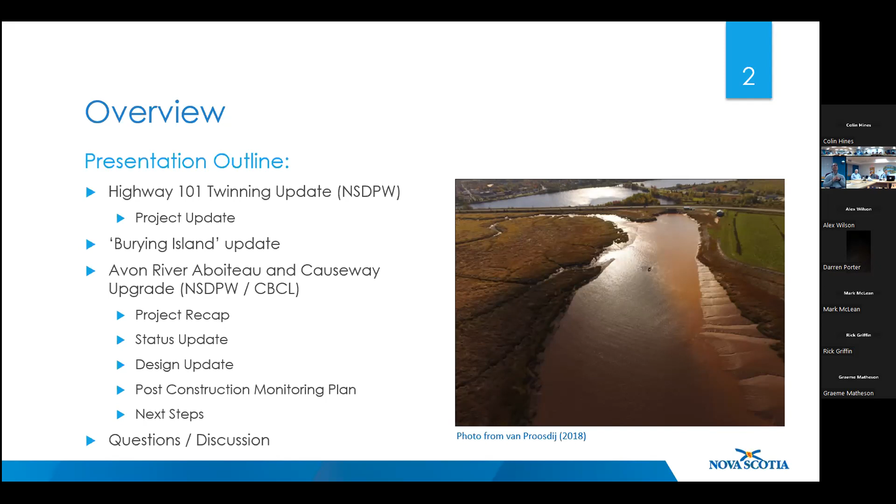Welcome everyone to the latest meeting. I think we last met end of summer sometime. So just a brief overview: like most of the meetings, a bit of a twinning update that Lyle's going to go through on where the highway construction stands today. There was an item brought up last time based on the Fort Edward report, the burying island question, and Bob's going to go through some stuff on that, we followed up there. Then there's a bit of a presentation by CBCL, and I might have some input on the Aboiteau and Causeway upgrading. And then discussion - I don't think we have to wait till the end for questions, we can hop into that in each section as they come up, so we won't limit that to the end of the meeting.

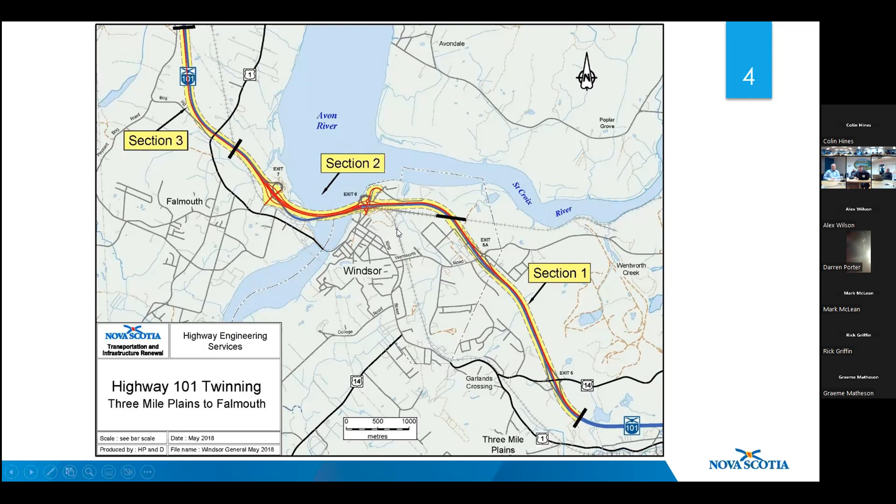So we'll just jump into those. Section 2A is kind of from that Windsor Railway area to exit 6. There are some eastbound lanes there that are still kind of, you'll notice, got a double yellow on it as you're heading eastbound. There's upgrading for that.

We're hoping to get that this fall, but just with the amount of work that's been going on in the province, we've ended up pushing that to the spring of 2023. So we're going to go out and do some remedial work to try to make that a little more driver friendly. We're going to take that double yellow out and basically restripe it.

To make it a little more driver friendly for the winter and into the spring of next year. So that's kind of that section here that you can see I'm just pointing to, from exit 6 up to where that Windsor rail tunnel is.

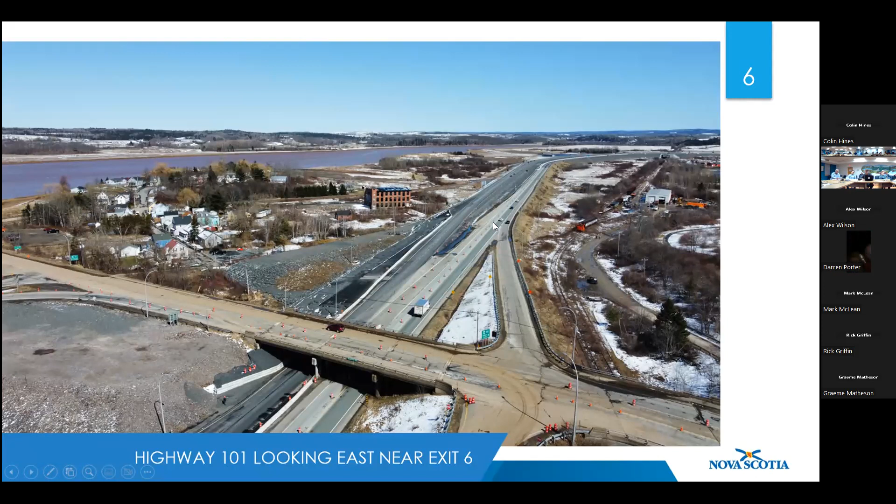Section 2B is basically from exit 6 to exit 7, including the causeway. We did do the final lift, or the final preload fill, along the causeway on August 18th. So that height you're seeing there now is it - that would be close to what the finished highway grades will look like. It's actually maybe a little bit higher.

We've actually surcharged it a bit to help accelerate the settlement, so that when we remove the rock fill and put in our gravels and asphalt, we won't see any net change in settlement, because the gravels and asphalt are heavier than the rock. We didn't want to see increased settlement after paving. So it is a little bit higher, but that's pretty close to what the final grade through that section is going to look like.

The exit 6 interchange, Nesbitt Street connector, we did start late last fall, and we are on schedule to be completed fall 2023. So we're really into like 8 months to go, and that will be done.

The sanitary sewer line that runs under the highway, that was currently going through one of our abutments, has been moved - that piece of the sanitary line for the municipality has been moved, put in service, and commissioned.

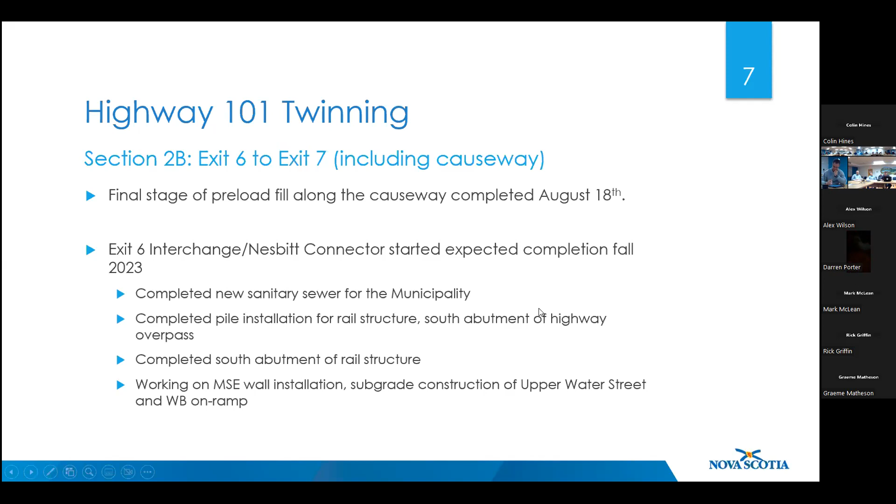We have completed the pile installation for the rail structure, as well as the south abutment for the highway overpass. We have actually completed the south abutment for the rail structure, and we are currently working on the MSE wall installations, some of the subgrade construction of the upper Water Street Nesbitt connector, as well as the westbound on-ramp.

Some pictures here. This is a picture from back this spring, April 2022, just to give you a quick site overview of what it looked like in April.

Is that July, Bob? Well, it might be - so it might be July. I have the same picture. So yeah, so it's July. All right, so it's July. Well, that's just even better - this is going to look better then.

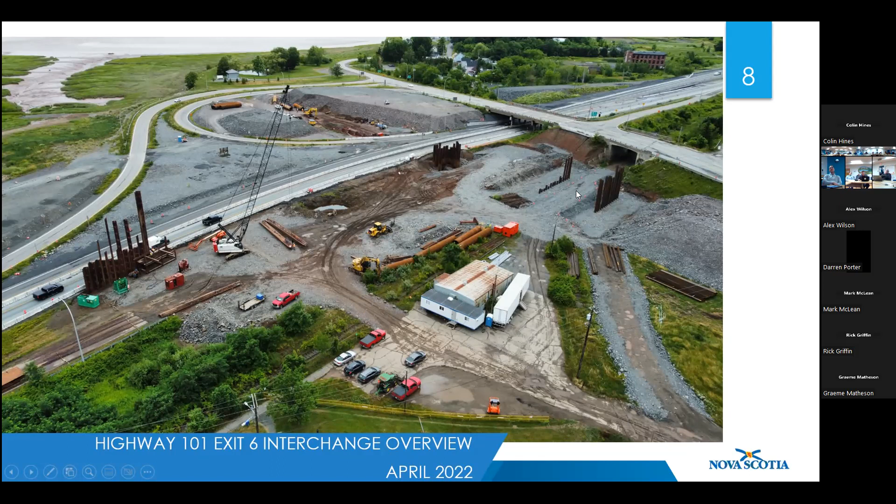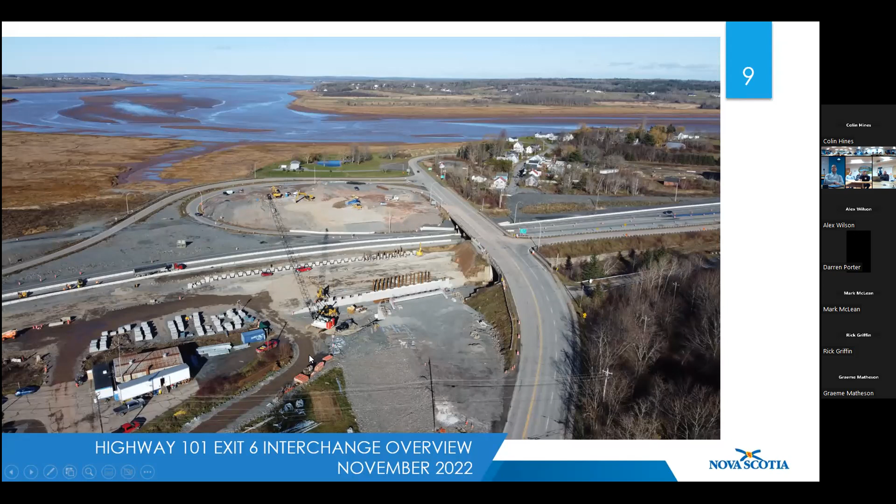So in July, this is what it looked like. If we fast forward to yesterday, so this is the site yesterday. Same site, but what we're seeing here is that we've got the abutment installed for the south abutment here. You'll see that the MSE wall construction is well underway. In the loop ramp is where we're doing the connector road and on-ramp. In a short period of time, there's been quite a bit of work since July, so that's not even 6 months. And here's where the actual ramp's going to be.

So this ramp, the new westbound on-ramp, is basically connected or contained by MSE walls on either side.

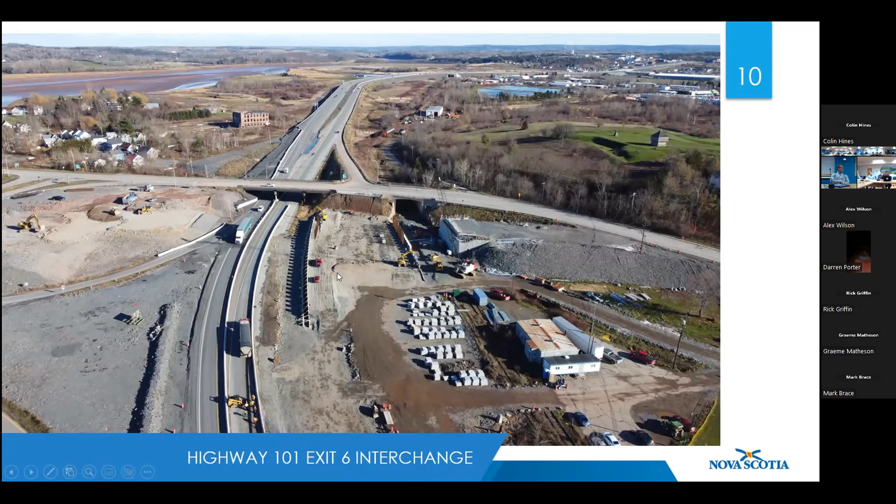So that's kind of the exit 6 area. Moving into, I guess, exit 7 and west of exit 7, we've got 2 projects to go there.

The first one being the actual highway, and we're looking at doing that connection and tying the new eastbound lanes in, then follow up with upgrading the westbound lanes, the existing piece of highway we're traveling on now. We are going to get the eastbound lanes open before the end of this year. So that's our main target right now, to get that open and tied in, so traffic will be divided west of exit 7.

Then in the spring of 2023, we will come back and do the upgrading to the westbound lanes. Similar to the other piece around exit 6, we will plane out the yellow line, the rumble strip, and restripe it with proper lane markings to make it driver friendly and more familiar for people traveling.

Exit 7 interchange, well underway. It's been a long process to get where we are, but we're getting very close now. Spring 23, we will be done.

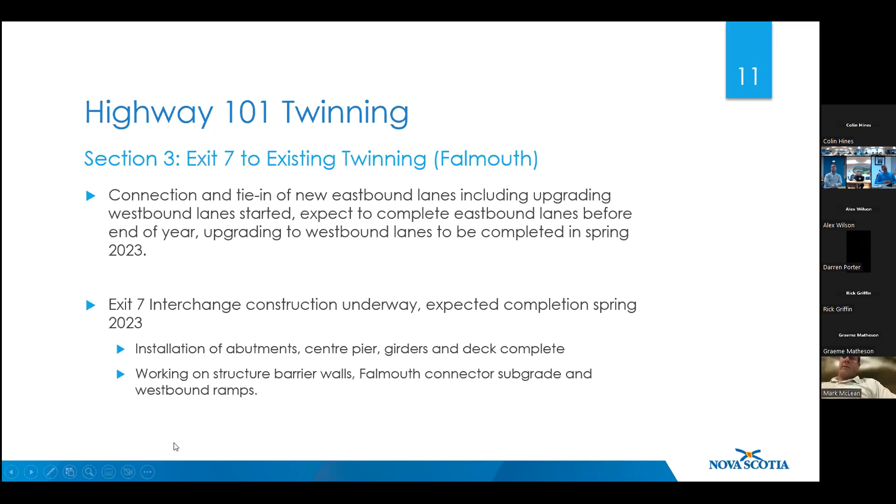The structure is just about done, but we're getting out of paving season for that area, so we'll be pushed into spring 23 to pave, open, and commission it. We do have the abutments, center pier, girders and deck all on. We're working on the barrier walls, getting the subgrade ready, and the westbound on and off ramp is being constructed. So just a few photos of that.

So this is, I guess, April. So this is what it looked like in April. You can see where the 2 abutments were cast, and we were basically working on the center pier pile cap.

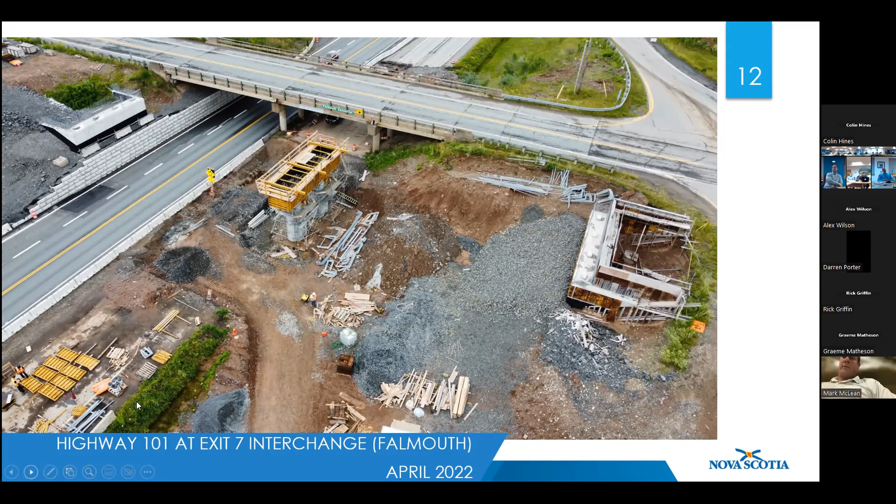Fast forward to yesterday, we now have the girders set, the deck on, and what the guys are working on are the barrier walls along the side. First casting of those will be tomorrow, weather dependent.

And in this picture, you can also see the new westbound off ramp is here. The westbound on ramp will be over here.

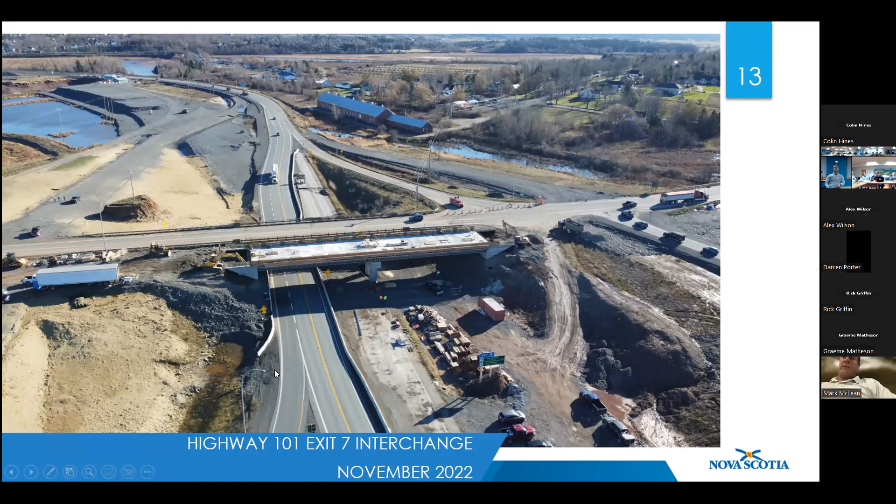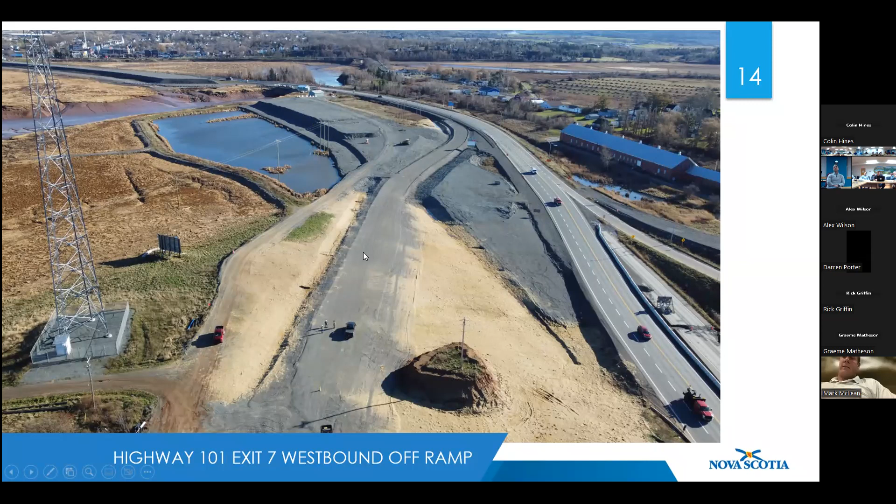That's just a little bit up close of what the westbound off ramp is going to be. Again, not in its final configuration. This is an interim configuration until the new lanes across the causeway are built. Then the westbound off ramp will come along here and tie in here. So this is just kind of an interim configuration.

And this is the eastbound tie-in, or west end tie-in I guess I'm talking about here. So this is just where we're going from 4 lane down into 2 lane. So this is where that work is being done.

You see here, the guys have basically got us widened. We got us extended, we're getting the gravels on. We're going to start grading up next week and move our rail.

With any hopes, we're hoping that not next week, but the following week we'll be paving, and potentially by the end of that week, I don't know the actual date, but we'll hopefully be opening this to single lane traffic and doing the cleanup before the holidays to get 4-lane open.

And I guess that's it for a construction update. So I'll take construction questions now.

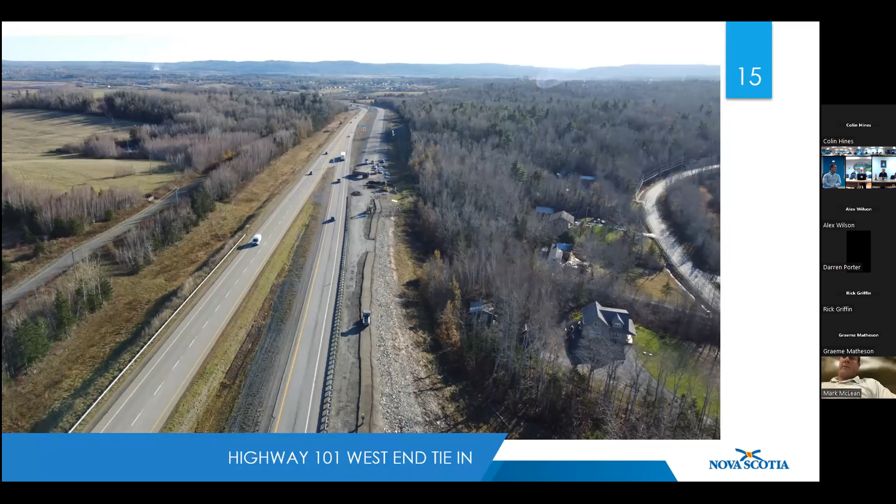Okay, let's see. Go just.

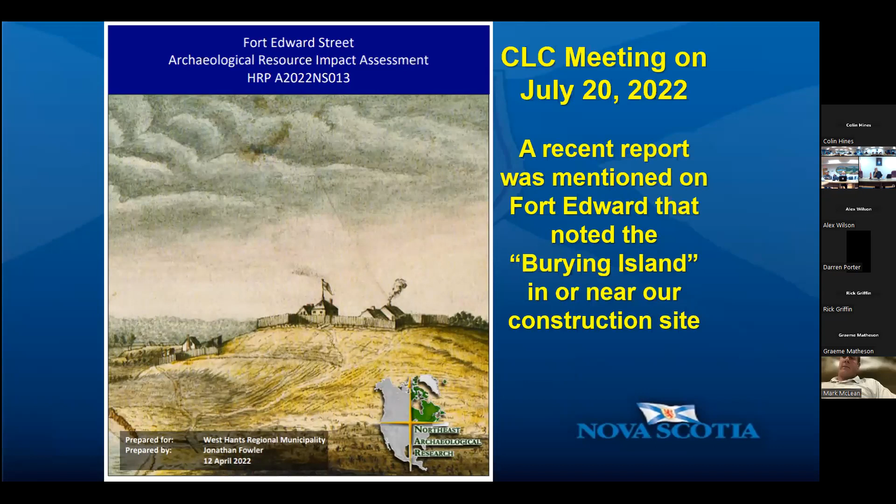As we mentioned earlier today at our last meeting, Darren Porter noted a recent report on Fort Edward commissioned by the West Hants Regional Municipality, which observed that Burying Island was in or near one of our construction sites. So I looked at some of the reports we've done and tried to summarize this information in this presentation. Hopefully it won't be too long.

I've learned a lot going through these really interesting pictures. This one from July 21st, which Lyle had previously shown, is one day after our CLC meeting on July 20th. It shows us reconstructing exit 6, the Windsor Hantsport Railway alignment, and a sewer line that was punched through to connect back to its outfall, just off into the marsh proper.

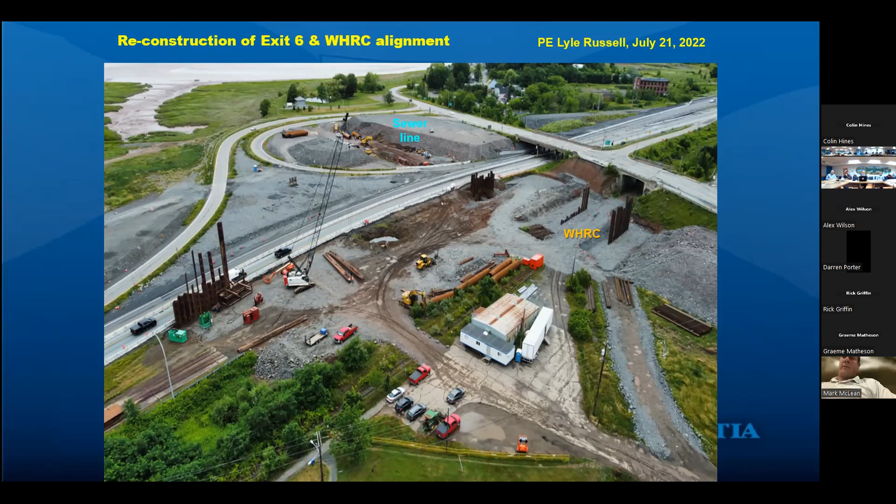So what do we know about Burying Island? Dr. Jonathan Fowler noted it in his report, and this piece of artwork he presented was actually the cover of a summary report we commissioned him to do, showing the whole picture rather than just the fort that was on his original cover.

You can see what appears to be Burying Island on this piece of artwork from 1753. I'm not sure if John Hamilton is the actual artist, or if it says so in there, but this is an interesting photograph from the National Library and the Nova Scotia Library, I believe, for this particular one.

We also discussed this issue with our archaeology consultants, Davis MacIntyre and Associates, whom we've worked with the last few years. Burying Island wasn't identified in any of their previous reports or their previous discussions with the Mi'kmaq KMKNO archaeology staff. So this is all new to us.

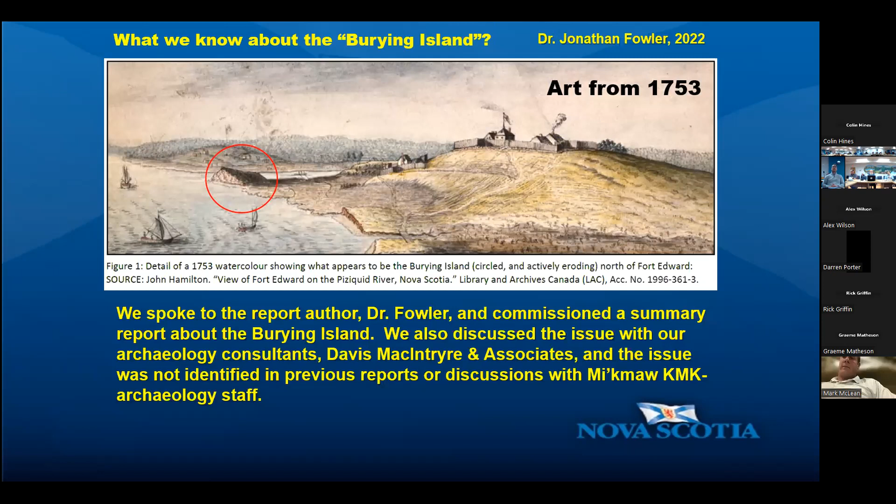So we wanted to look into this, and as I said, we commissioned Dr. Fowler to make a summary of his comments and notes about Burying Island.

As noted earlier in our CLC meetings, I'm a marine ecologist and oceanographer by training, so I'm trying to interpret this from my own slant, looking at the bigger picture and taking more of a systems view rather than focusing on smaller details, unlike the archaeology side of things.

I took note that Dr. Fowler recommended looking at a variety of maps and other imagery, including art over time, to get a good idea of what's happening on the scene at different points in history. For me, the British Admiralty chart is probably the earliest chart we have with actual surveyed information about this area, produced in 1858.

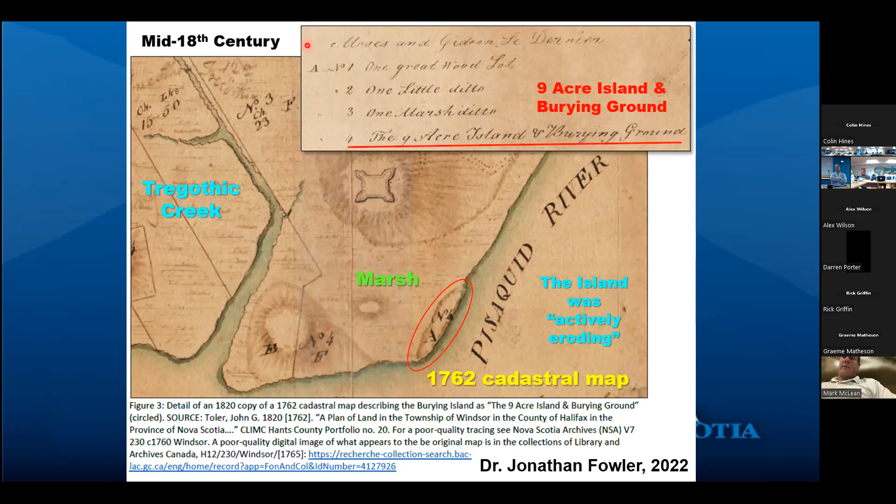As we noted on that original piece of artwork, it looked like that island was actively eroding by the currents in the Pisiquid River, now the Avon River, going right by. At that point in time, the Avon Channel was right along the now Windsor town site. It hadn't bumped over yet to the west side.

It's a map approximately 20 years later, another cadastral map from 1785. Dr. Fowler's report shows this drawing that shows the Burying Island located here. One of the important things it shows is the distance from the bottom of the toe slope of Fort Hill over to the edge of the river, 800 feet. Knowing this and all this orientation allows us to georeference to modern day imagery, including LiDAR, which he then shows in some of his further works, coming up here.

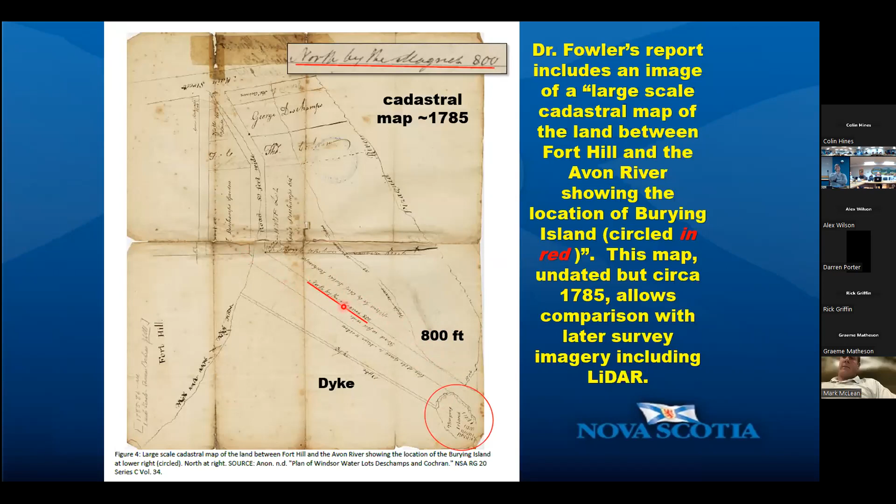Here we superimpose, or Jonathan superimposed, that old cadastral map on top of some aerial survey in its correct orientation and correct scale, showing where it is relative to the fort up on top here. This shows that 800-foot distance going from the bottom of the hill out to the edge of the river, marking the approximate location of where that Burying Island was relative to current things. So it's right in that loop ramp of our interchange.

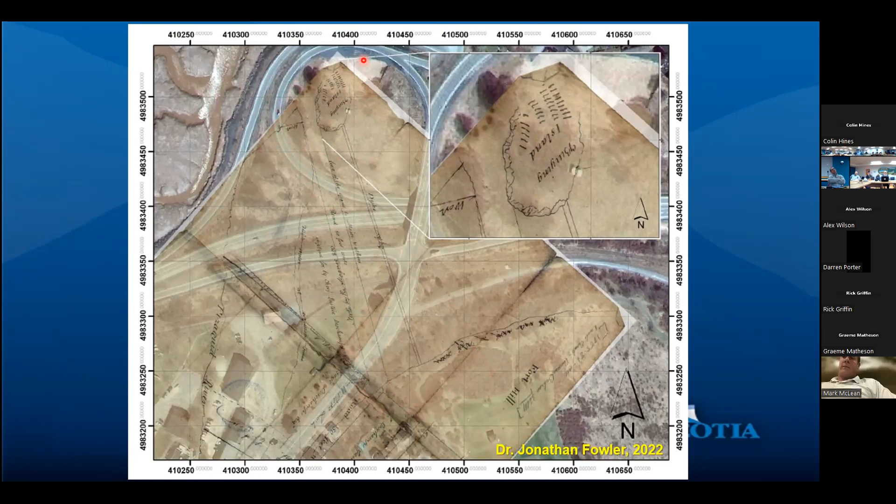This also shows the current dike work, the horseshoe dike that goes all around, joining up and protecting these areas, including around Burying Island. That 800-foot indicator on the other map basically helps us tell where things are relative to a church site, an Acadian church that was on site from earlier in the 18th century. In 1750, the church was demolished when they built Fort Edward.

And I made a note there: later in the 18th century, the maps subsequently called it Shipyard Island. So it's Burying Island, it's Shipyard Island. This is showing some of the changes we're going to see over time.

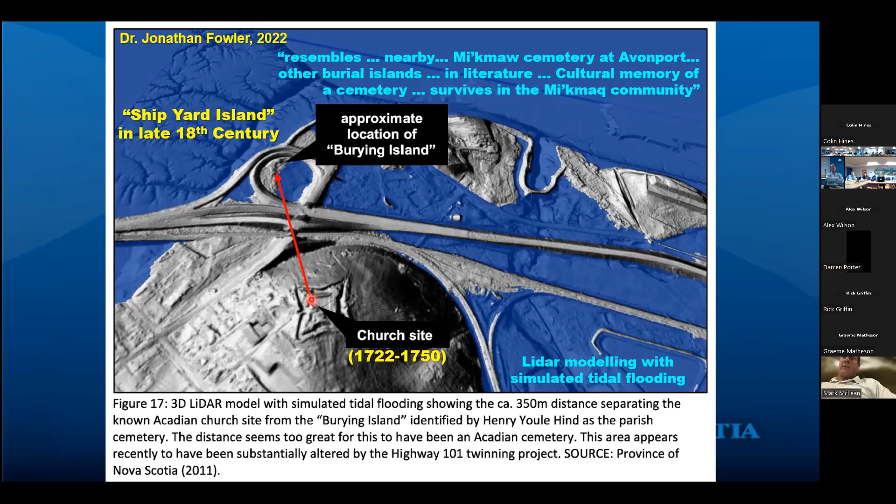Here we see it in that late 18th century map. They don't have the exact date on it, but it's now showing it named Shipyard Island. There are actually some of the very first dikes in the area here. These weren't Acadian dikes — these were dikes apparently done when the British were in power, and it may have been done by one of the original owners there, a Swiss fellow who grew up in France and was familiar with dikes, and did some of the earliest diking in the Windsor area.

So besides the natural wearing down of the island by erosion of the river, we've got dike work, new shipping activities, shipyard building going on in the area, starting the ground disturbance of that area back 250 years or more. You can also see the semblance of a dike or some sort of structure on Tregothic Creek, a predecessor to the now Horseshoe Dike.

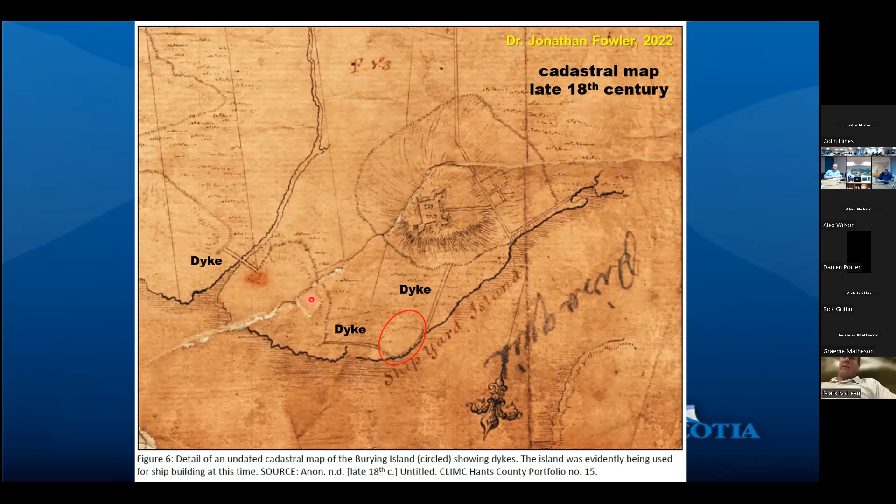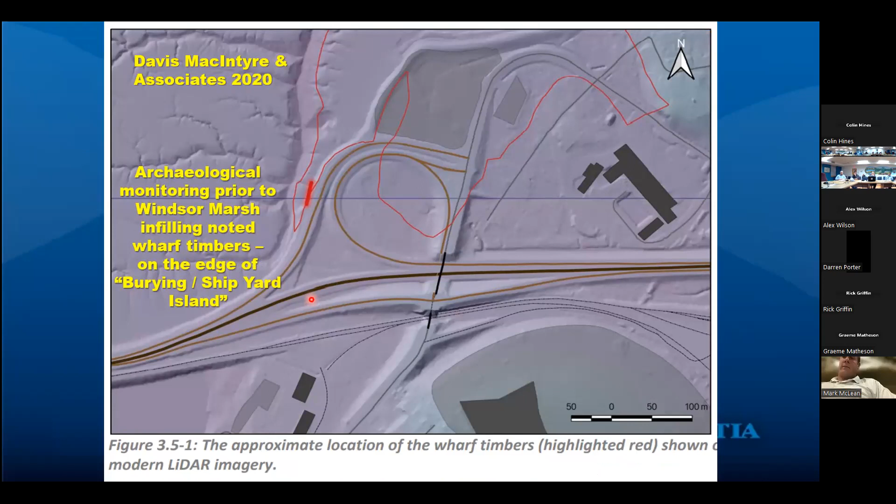This is Davis MacIntyre and Associates. When they did the report in 2020, they had actually found some old wood beams and piles right along the edge of the current on-ramp to Highway 101, and perhaps right on the edge of Burying and Ship Yard Island. We'll see some more about this coming up.

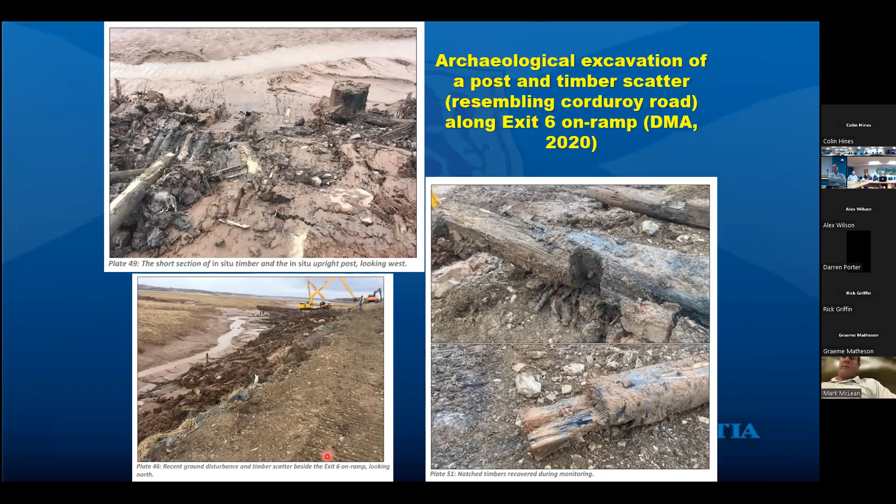So we now move up into the 19th century. It's about 100 years later.

So it's starting to see even more development in the area, and more disturbance.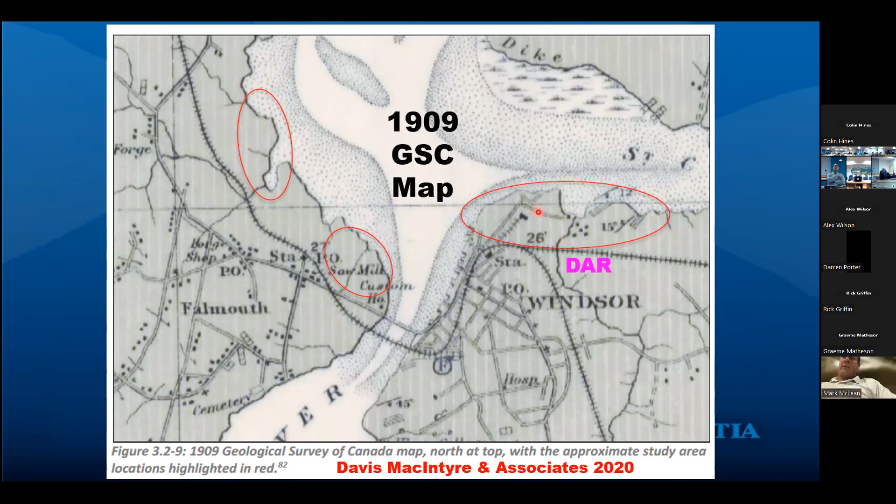We have a picture from 1929, and you can definitely see seawalls all along the edge of Burying Island, still visible. Out in front, you still see some foreshore marsh and mud flats. So this area hasn't seen too much activity through those war years, and there's not much too much left there on Burying Island through all its shipbuilding and shipping kind of area works for the previous 100 years or so.

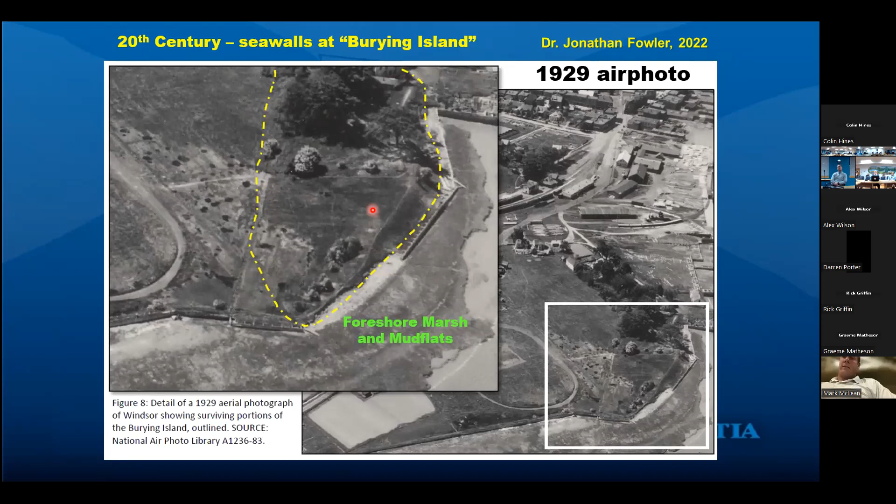Skipping up to 1945, just into the war kind of time frame. Davis MacIntyre had in there showing a georeferenced photograph, so they could show where the findings of those wooden timbers were, and they're lying right on top of that spur line and pier system where they were loading ships.

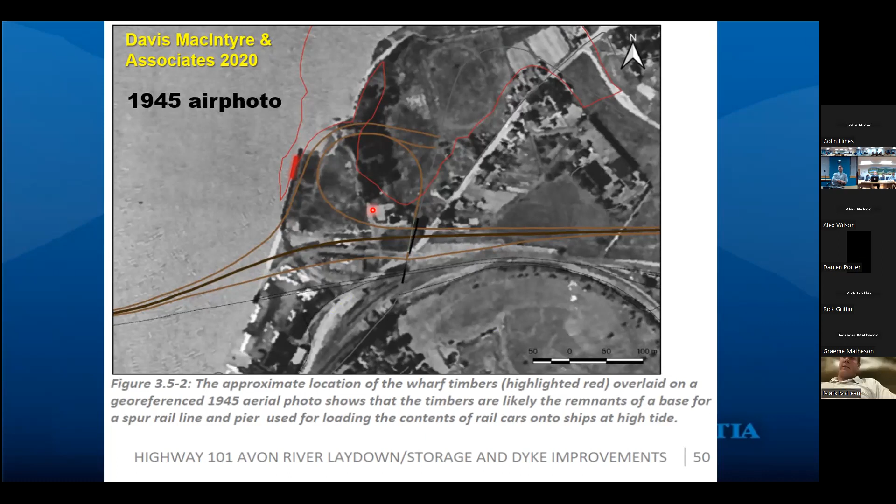I just like to show this picture under another pre-causeway one from 1963. It's one of the few photographs I've seen that actually has at low tide shots. You can see the braided channels in the Avon River, and it's still pretty clear.

You can see what's left of the burying island. It's fully diked in now through the system here, right around and then through to the Horseshoe Dike. There's a remnant marshy area here that is quite interesting. It's still there.

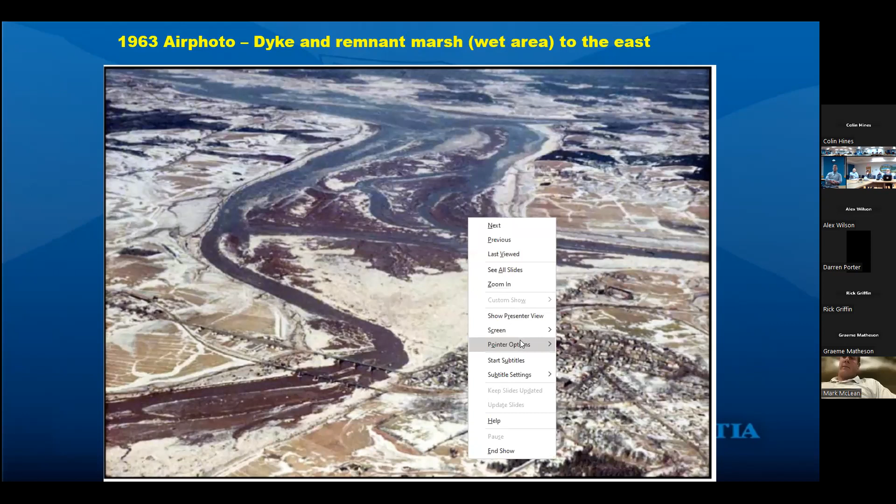Oops. That's my pointer here. No, didn't work. Did I jump too far?

No, that's all right. Okay, so this is the next photo in line that I had from the 60s to the 1970s. This is just before opening. It's from one of our Nova Scotia Department of Highways annual reports. We've seen this before in some of the earlier CLC meetings, and you can actually see some timbers and the like.

I believe that DMA found these, because between 1970 and there's been some additional infilling along this edge to protect it. And it's interesting that it's an exact location of where we found some things. We don't know how old those are, but it's right on the edge of Burying Island, which would be right underneath here. It's difficult to tell if there's any surface still left, given yet more construction and ground disturbance as we built the causeway and the new highway.

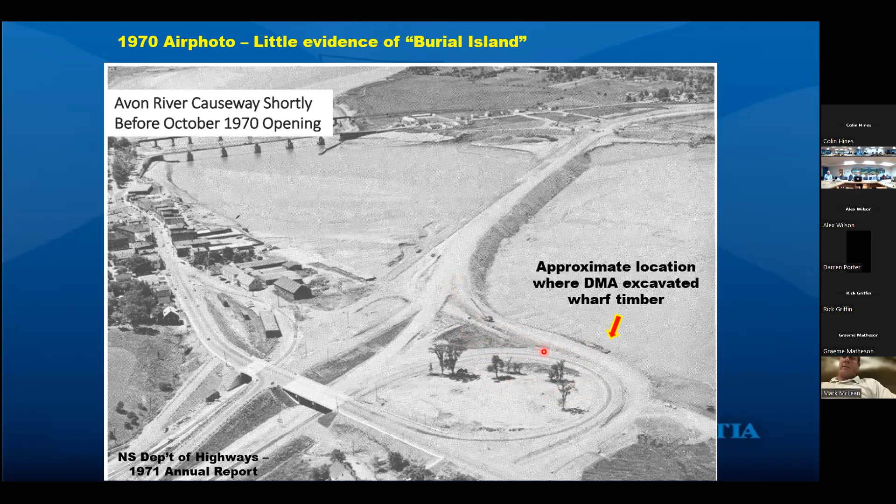Here we are back in July, and it's under reconstruction. As noted before, we've had a lot of disturbance on this island. It resembles some other burying islands around this area and province where they actually have archaeological evidence for Mi'kmaq burials. So it's possible this area may have been a burial site, similar to those other islands. It's unclear, we've never been able to find any evidence of it, but it's not saying it wasn't. There is cultural memory of a burying area somewhere in this vicinity, through discussions with Mi'kmaq.

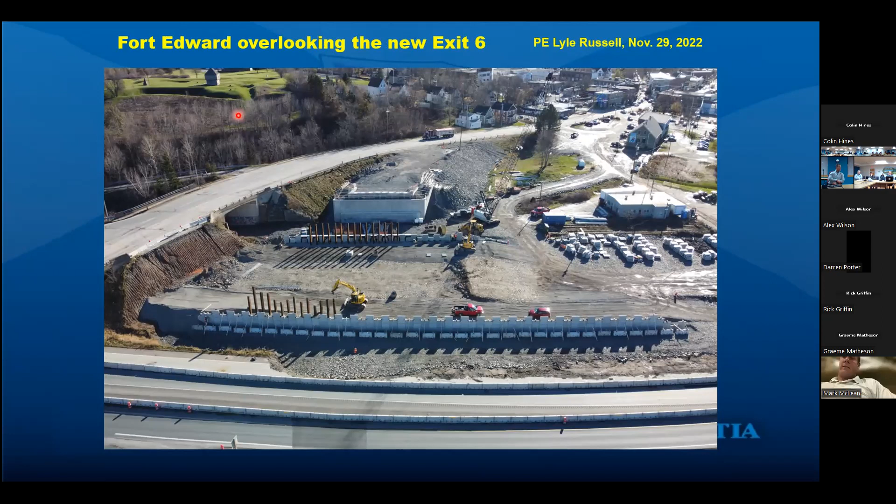Anyway, these are some additional shots that Lyle collected yesterday, and another shot of the area looking north over exit 6, the location of the burial and shipyard. You can see the continued ground disturbance in that area, and it's pretty permanent now.

And another shot showing the three islands that we saw back in 1909. We know more or less where they are, and there's definitive evidence for those islands. We're unclear if there was a burial ground there, but there's certainly a potential for it. Unfortunately, I don't think it'll ever be possible to find any human remains there, and nothing was ever noted in past developments in the area.

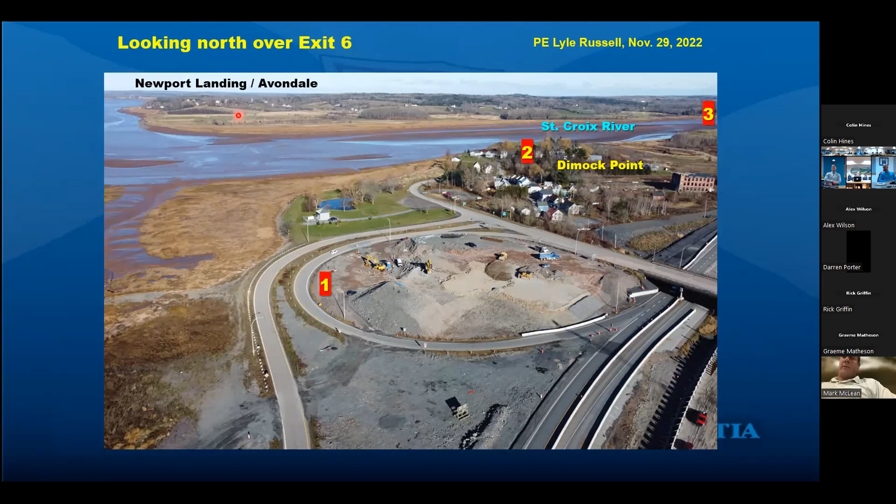So basically, we've been in conversation and provided information to Nova Scotia Communities, Culture, Tourism, and Heritage. More archaeological monitoring is going to go forward as we continue work in this area. Additional work besides the highway work will include tying in the updated dike system to the new road system. Davis MacIntyre and Associates will be conducting that work under new heritage permits, so that information will become available, and those monitoring results can be shared in future CLC meetings. So that's the presentation I do for all this. I learned a lot, hope you did too, and welcome any questions.

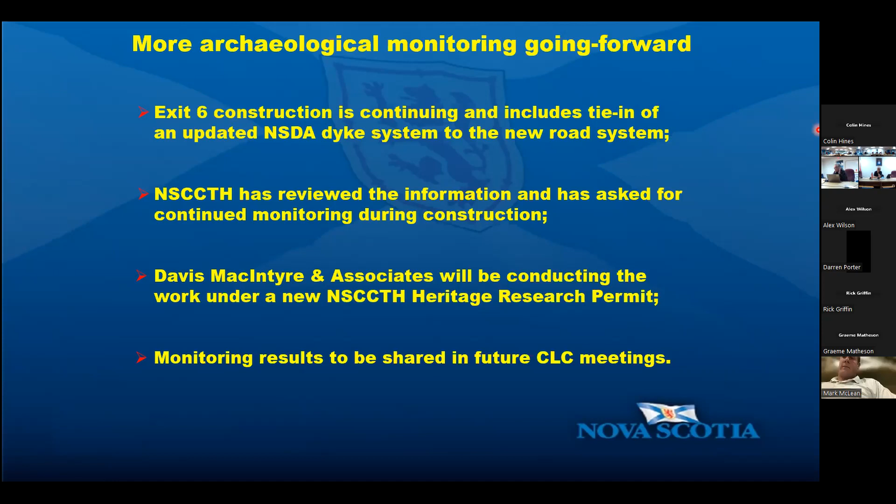I think that's really important. One comment you made early on when looking at exit 6, you identified the sewer line that had been re-established there. I'm not sure if it's you or Mr. Russell who deals with it, but you mentioned it continuing through to the marsh proper. I wasn't sure about that, because I don't know that it goes through to the marsh, does it? Or did you mean to the pumping station? Yeah, thank you, I just wanted to be clear on that since we've had quite a bit of discussion here about it, so I thought it was important to ask for clarity. Thank you very much.

Oh, sorry, do you want me to ask the question again? No, okay, I was just agreeing. I just forgot to put my mic on and nobody reminded me. Yeah, you said it just for me. Absolutely, yes.

It does go to the pumping station and then off to the marsh.

Thank you very much, yeah, I agree. It's nice to have that follow-up, isn't it, after that discussion in the last meeting. Sorry to be distracted, but Liz Galbraith was just asking for a link and I don't think we can get her one.

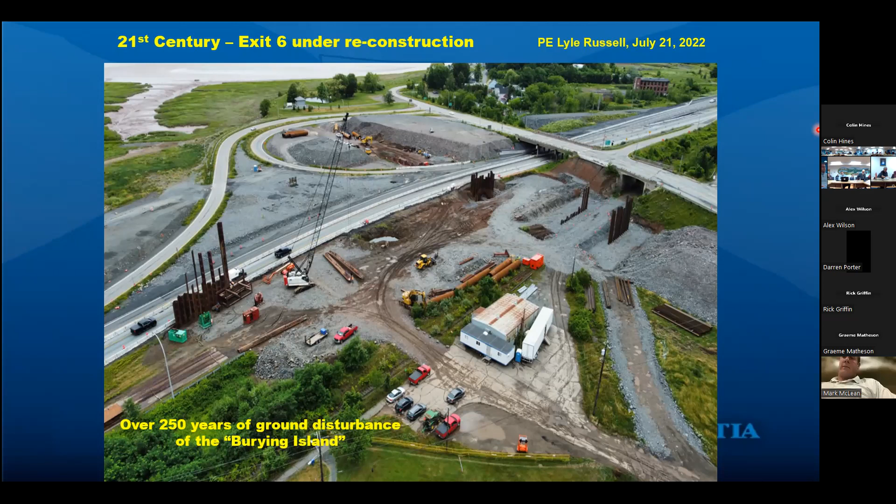Yes, hi Mark, this is Alex. I was going to ask you the same question. So this seems to work, so if you're okay with this, I can ask you to just follow the slides. Yeah, I can advance them unless you wanted to point at anything on your end and wanted to share, but either way works for me. Yeah, I think this should be okay. Yeah, thank you.

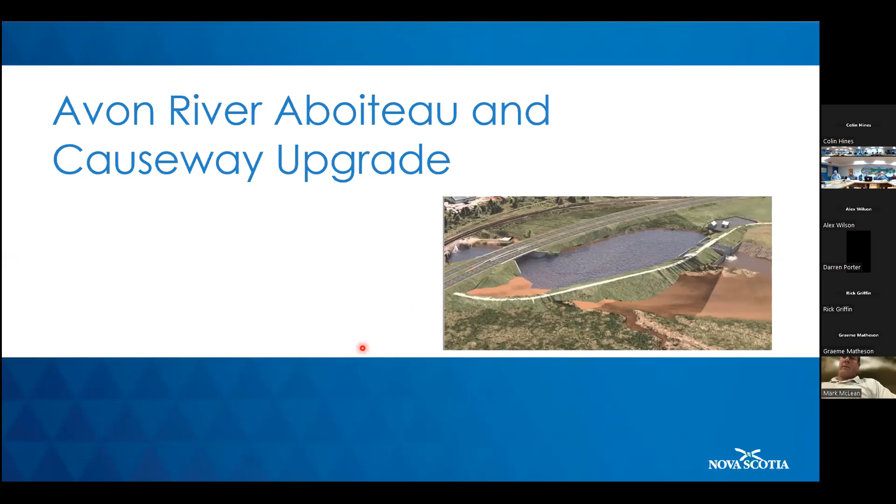Please bear with me. All right, so we'll start with the recap of the project, really focusing on the Aboiteau itself, and we'll go into a little bit more detail about the different aspects with the design and its current status. Very similar to what we presented at the last meeting. So I'll just go through this.

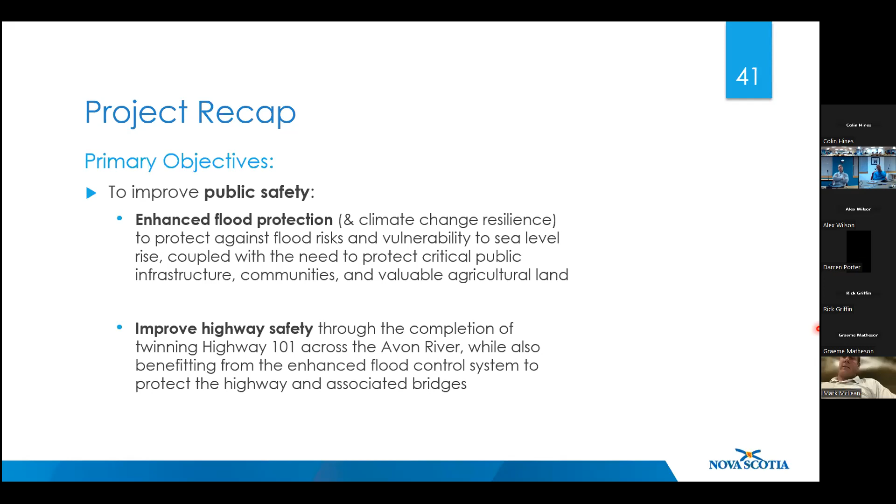Primary objectives, always important to remind ourselves about them, include enhanced flood protection and climate change resilience to protect against flood risks and vulnerability to sea level rise, coupled with the need to protect critical public infrastructure, communities, and valuable agricultural land. Also related to public safety is improving highway safety through completion of Twinning Highway 101 across the Avon River, while also benefiting from the enhanced flood control system to protect the highway and associated bridges. So the structure and the associated dike system is downstream of the highway bridges and provides flood protection to those structures. Next slide, please.

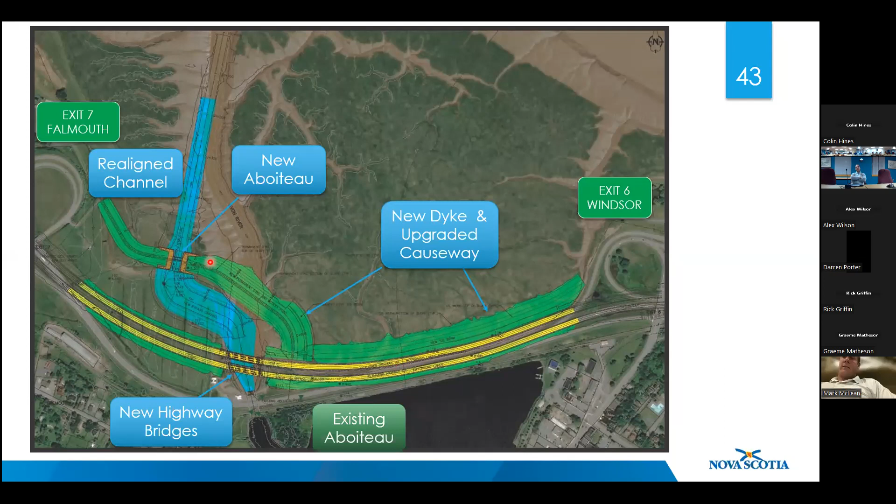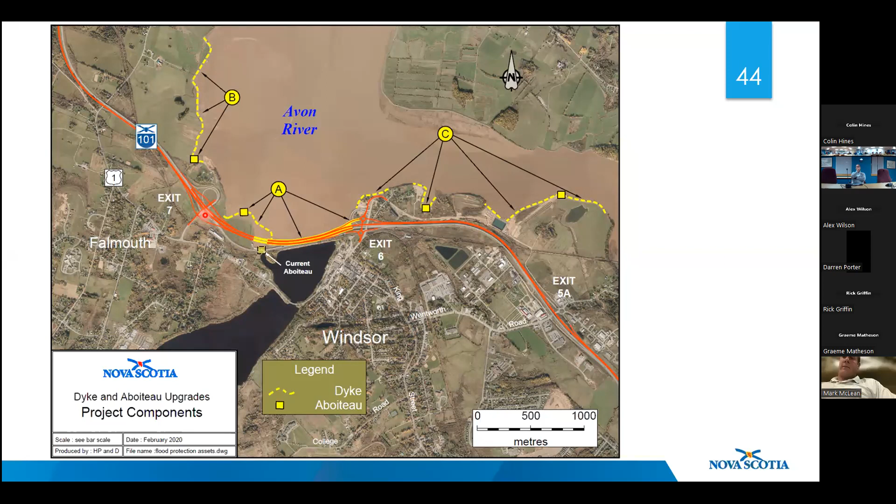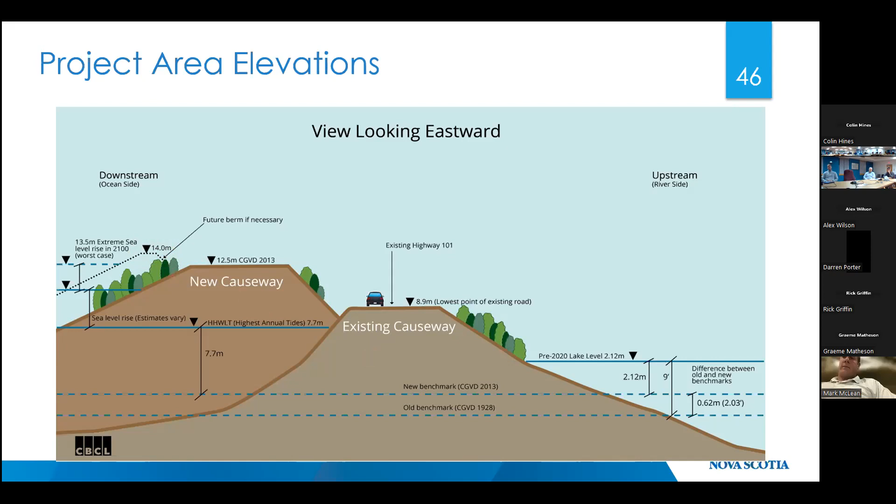Important elevations in there are what we call the typical, or prior to the DFO order to open the gates, it was at elevation 2.12, and this proposed structure has 2 sets of gates.

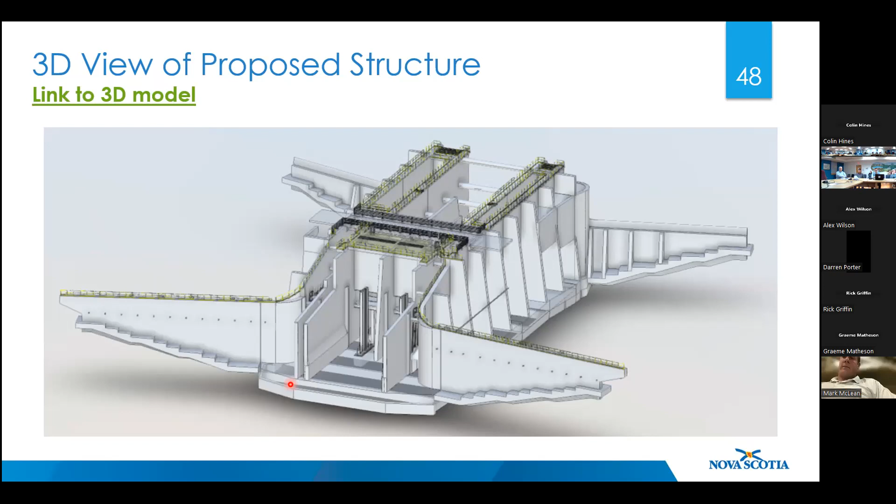Right, regulatory approval status update. I'll note about Nova Scotia Environment, Climate Change, Environmental Assessment, Transport Canada, and DFO approval status. There are renderings of the structure to visualize what's being considered and water moving in and out. It's a very large structure with a lot of capacity for water moving in and out. You can see the downstream dissipation pool, with protection around it covered with vegetation. There's riprap for energy dissipation around the structure, covered with topsoil and vegetation, since it still allows the protection to happen. Since there was interest in having the slopes vegetated by the Mi'kmaq, this is something we made a point of including.

Nova Scotia Environment, Climate Change, Environmental Assessment Project Description Update. In June 2017, the Highway 101 Twinning 3 Mile Plains to Falmouth project received approval with conditions. NSECC requested additional information on the changes to the project, specifically on the aboiteau structure. Nova Scotia Department of Public Works provided an update to the environmental assessment in April 2022 to describe the advanced engineering design and operational abilities of the structure, the context and rationale, and a directed assessment of environmental effects related to design changes since the 2017 EA. Nova Scotia Environment Climate Change is still reviewing the document, and consultation with the Mi'kmaq is ongoing.

Yeah, no change at all. Maybe it's just those views that are more artistic than accurate. But no, they're generally representative. If something looks different, it's just looks that way—nothing's been changed.

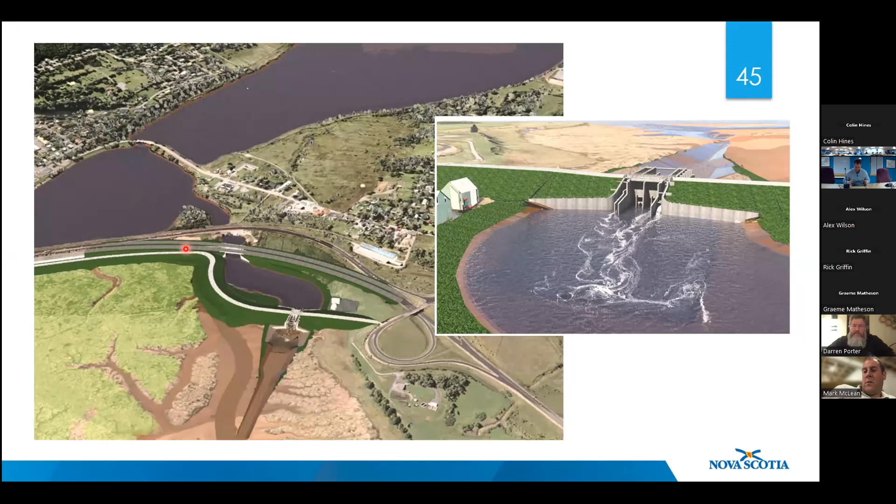Last question—you had mentioned the flap gate. I don't remember that being in option D. Is that something I just misunderstood? It's just a place to put a flap gate if we go there. There could be flap gates if we decide to make the whole thing completely passive, or partial flap gates. It's just a place to put them if that's an option considered. We really don't know what this will end up like at this point, so it's as flexible as it can be. That's essentially where we are now.

Thank you, Alex. Thanks, Darren. Mark McLean.

Yeah, thank you. I don't know who can answer this question, but I'm just curious what kind of price tag would be on this concrete structure for the aboiteau. Is there a budget proposed for it, or just some rough numbers?

I think we're still waiting on detailed estimates. If things are still in flux, it's hard to say exactly, but it's certainly not cheap. The project would basically include the two bridge structures, the highway twinning, dike work, and the aboiteau—so it's tens of millions, I would say, as a rough estimate.

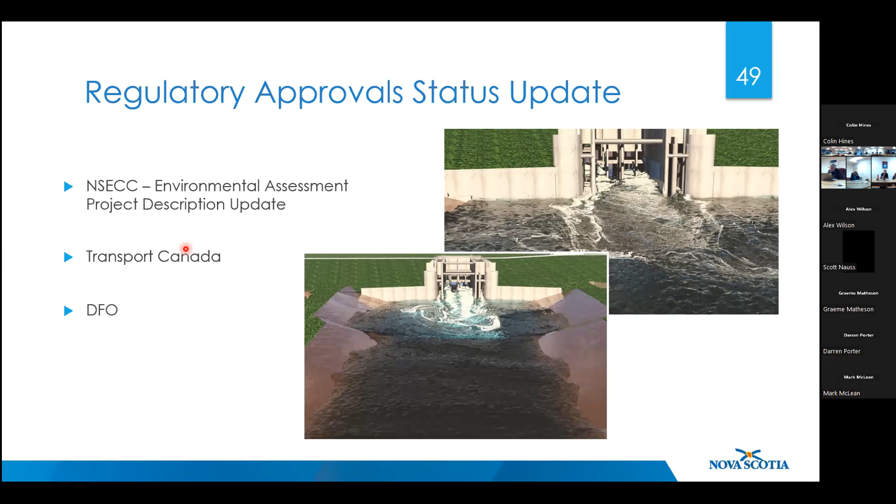Yeah, thank you. So this is probably my last one of the night. I didn't take notation, but it seems to me at one point during the presentation, it may have been Alex talking to it, and it had to do with the depths of water I think I was hearing. I don't even want to quote the number because what I think I heard doesn't seem to make sense. But were we getting to discuss what kind of water depths we would actually see in the basin, given that we've gone from what was a lake appearance prior to any work being done, and now we're down to basically a creek flowing through with water in and out? Any sense as to what we'll end up with by way of water in that basin based on the design in front of us now?

I can answer that. Essentially, at this point, since we don't really know how the structure will be operated, we cannot estimate at all what this might look like, because there's a range of options from the typical lake level shown on the diagram down to the low flow creek that's there now, and anywhere in between, with some constant levels and some varying ones. Right now, what we're trying to do is identify what option is most favorable for fish passage and answer the DFO questions. Depending on all the information produced and how it's interpreted by DFO, any scenario could come out as the preferred one at this point. We really don't know. The structure can operate in that full range, all the way up to that height down to the creek level, and DFO is asking for additional information on more scenarios. So we're pretty reliant on what they're going to permit.